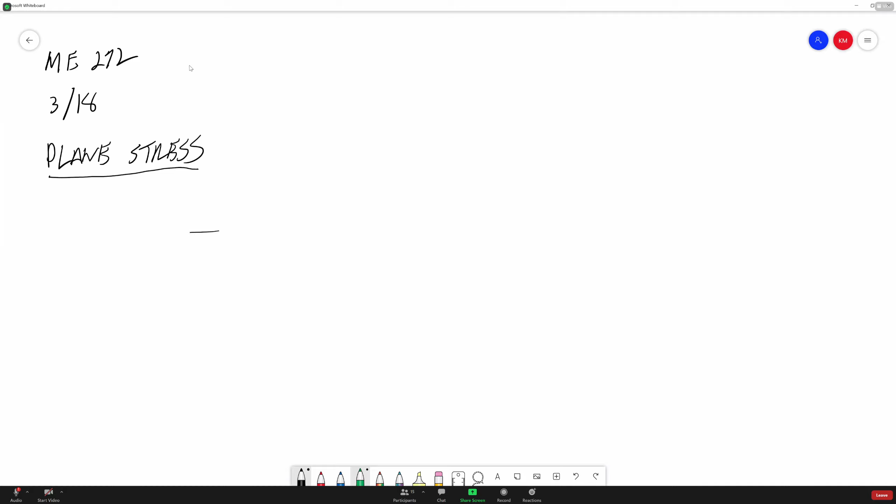So plane stress is a condition that you assume when you have thin plates, very, very thin plates. I guess we need a coordinate system here. We'll just do X, Z, and Y. And we have a condition where we can have sigma XY, opposite sigma XY. Actually, we could write this like this. Hold on.

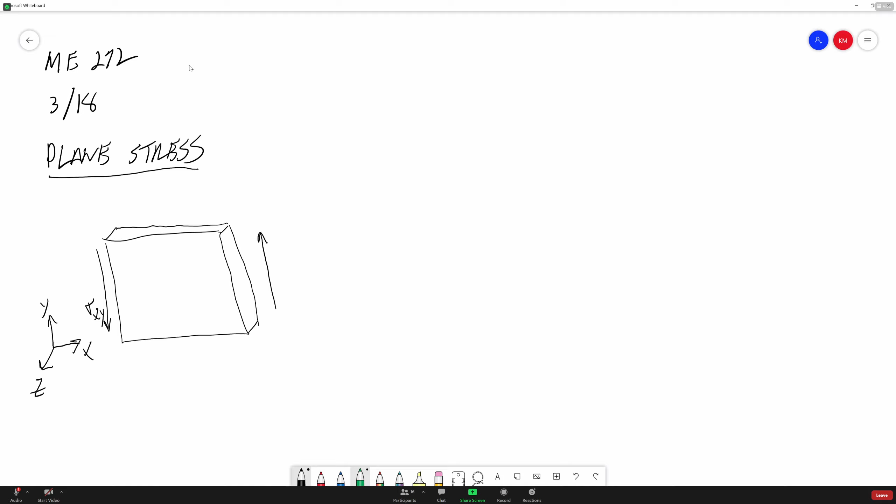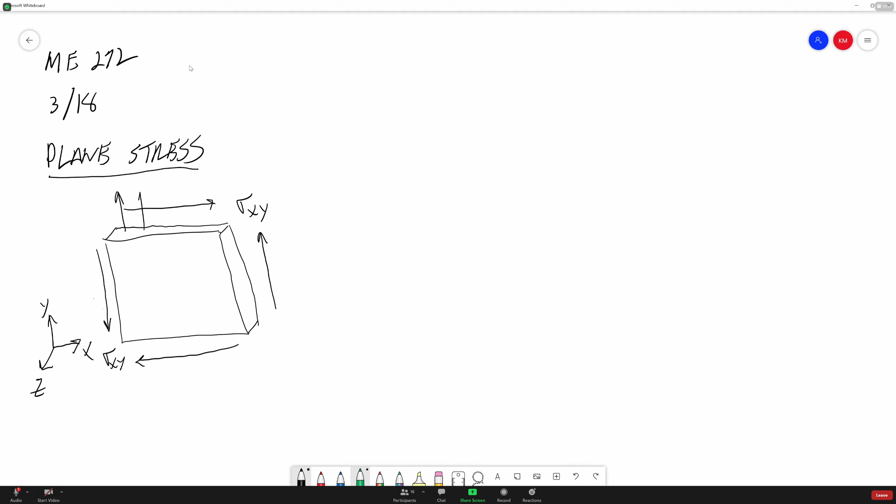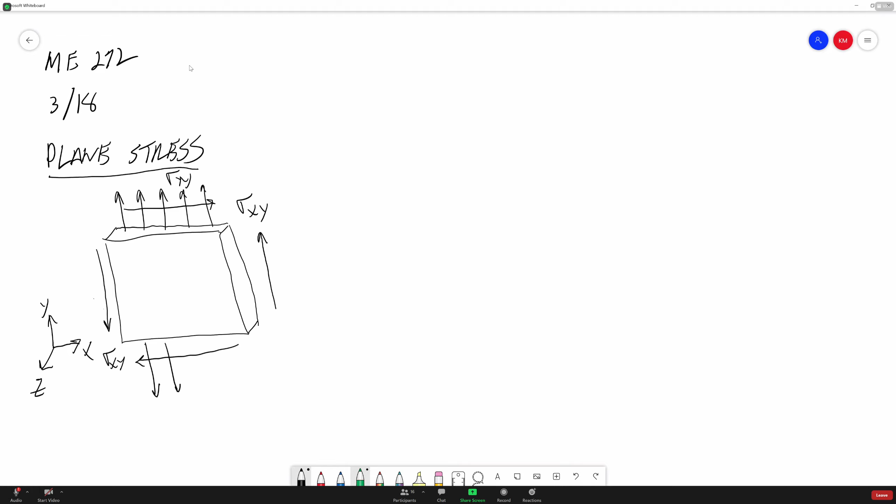So it corresponds to both. And then out of the edges, we have sigma YY, sigma YY, sigma XX. So some of the bullet points: plane stress corresponds to a condition where all three out of plane components of stress are identically zero throughout the region.

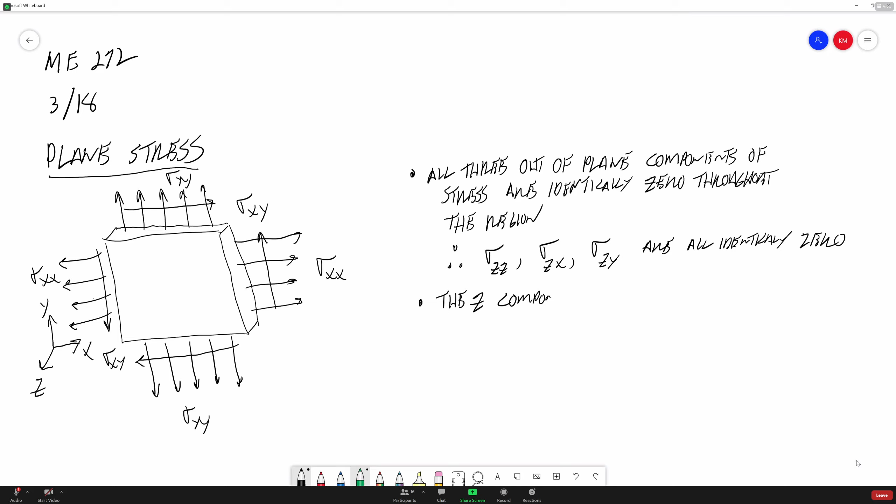So that means sigma ZZ, sigma ZX, and sigma ZY are all identically zero. So we have no stress through the cross section of the material. It's super thin, and I always think of this as almost like a plane, an infinitely thin sheet. But the big but is the Z component strains are not necessarily zero.

For plane stress in the XY plane, the magnitude of these Z component strains depend on the constitutive equation.

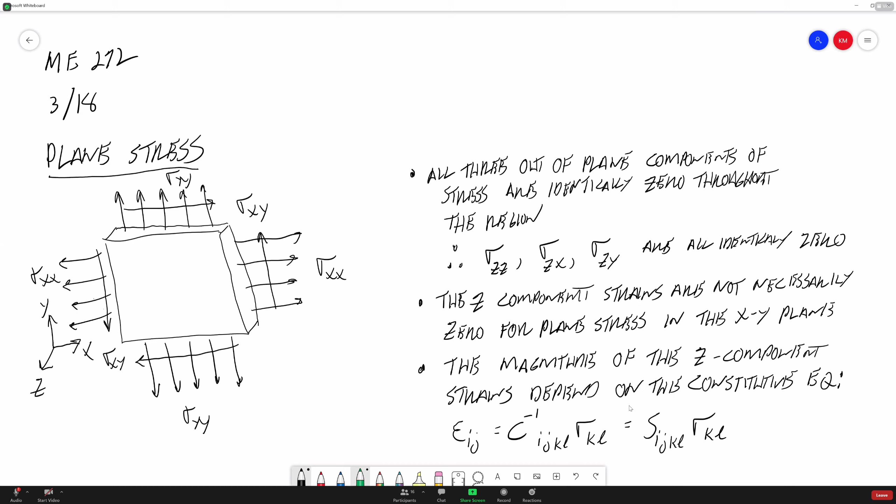epsilon_IJ is equal to C inverse_IJKL sigma_KL, which is also equal to compliance S_IJKL sigma_KL. So the magnitude of our Z component depends on that constitutive equation.

The out of plane normal strain ZZ is non-zero for materials having a non-zero Poisson's ratio.

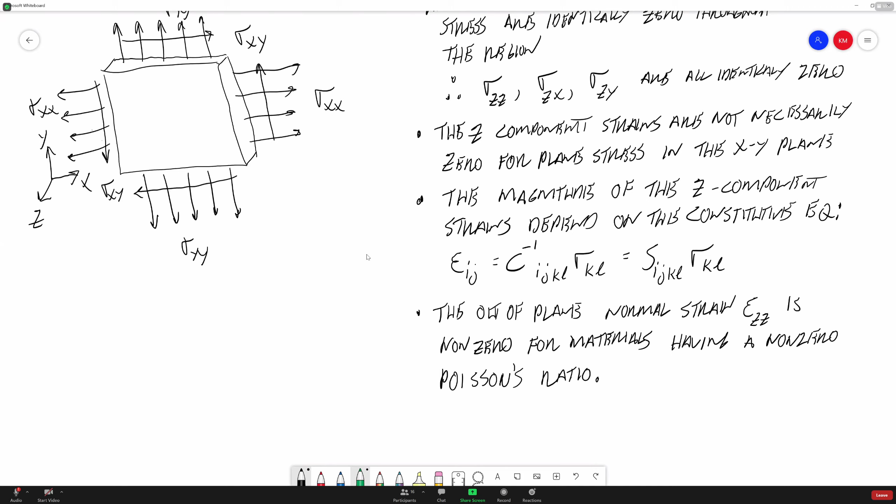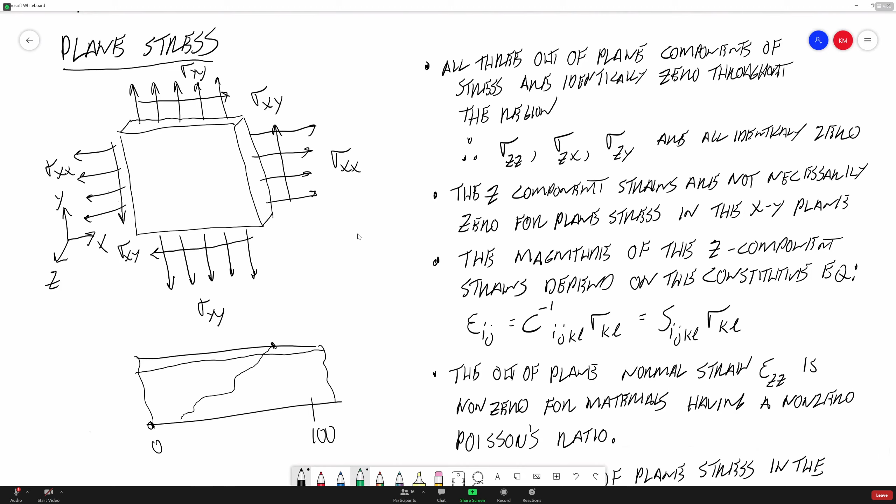And then the opposite of this is plane strain, right? That's where you have a nice big cuboid. So plane strain. This is a very good picture. Maybe we just write out the bullets first. Let's do the bullets. Well, the photo I have here is kind of just a, yeah, I don't like that. Exaggerate it.

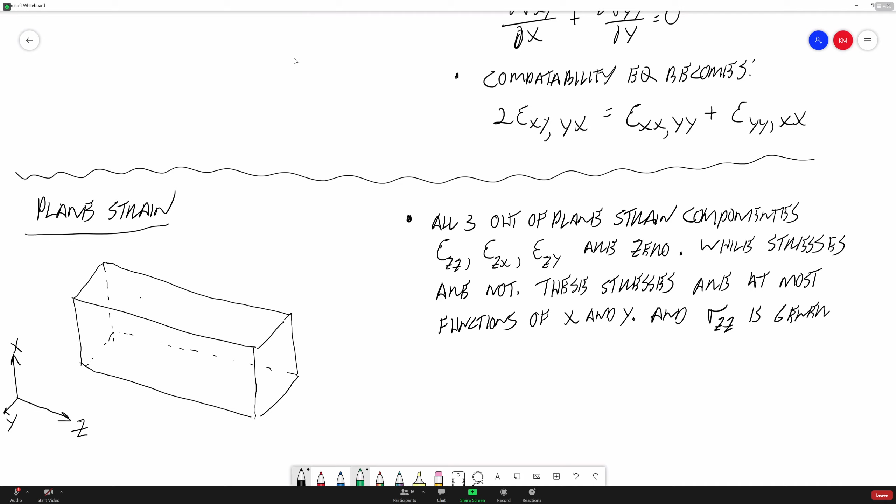Something to note is these stresses are at most functions of X and Y. And sigma zz is generally non-zero.

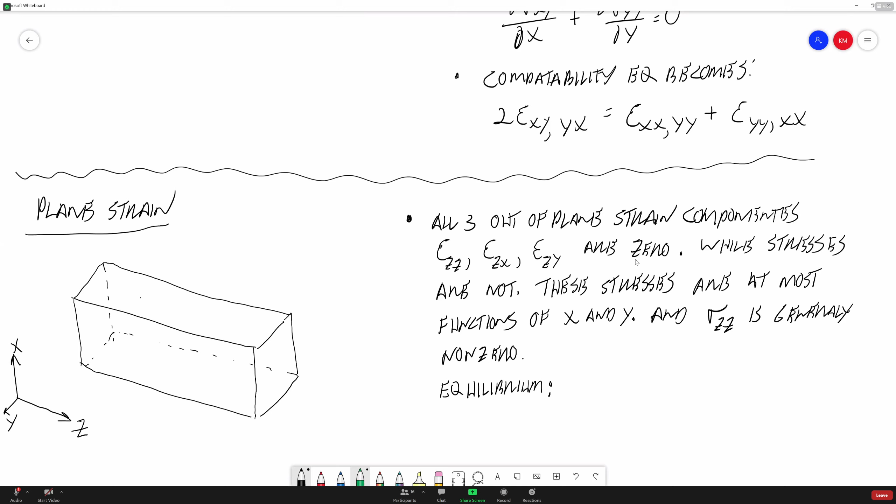So equilibrium looks like partial sigma xx with regards to x plus partial sigma xy with regards to y equals 0. Partial sigma xy with regards to x plus partial sigma yy with regards to y equals 0. Where sigma zz is equal to a function of x and y.

Stresses are considered independent of z. So compatibility looks like this, and it's the same.

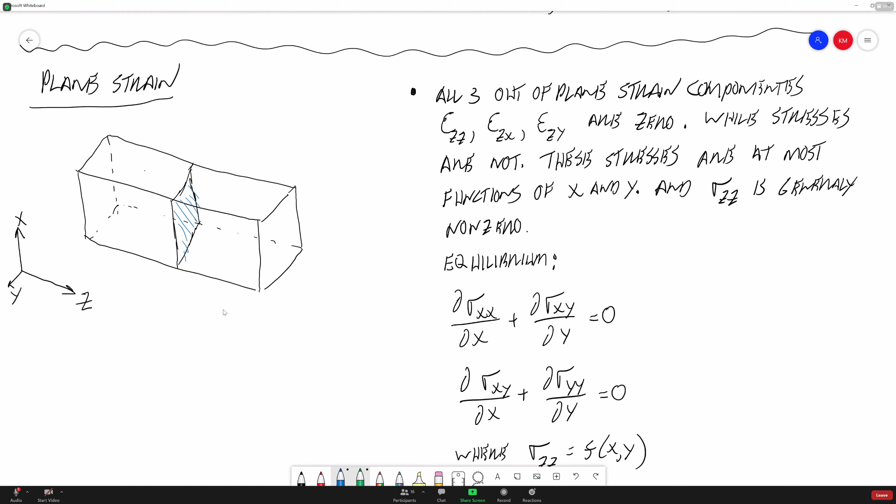So once again, it's kind of up to the user to say, oh, I have a really thick, long component. I'm looking at this cross section in here, and my Z is really long relative to my X and Y. So I'm gonna assume that my strain out of plane in these are 0. You can calculate it, but it's going to be kind of in the noise. So when it comes to finite element methods, it doesn't come into play at all.

You just calculate displacements regardless of this, and then you use your constitutive equation to find your stress. So finite element method won't take that into account. It's up to the user to say, oh, this is a thin plate, therefore I'm not gonna pay attention to the stresses going through the cross section, or oh, this is really thick here, I'm not gonna pay attention to the strains going through this. I'm only gonna focus on stresses, or vice versa.

Right. Yeah, if you were using shells or surfaces, you're kind of assuming there's no... It's plane, yeah, plane stress. Yep. So you're not worried about the thickness, the stress through the thickness. Mm-hmm. That's right. Okay. So that's a little bit on plane strain, plane stress.

There is one other topic it would have been cool to really get into, but we need like the whole rest of the class to do that. There's some stuff that has to do with bending and what really goes on in a simply supported beam. In general, it's kind of an interesting topic, and I'm just going to talk to you about it very conceptually, so you know that there's something going on there.

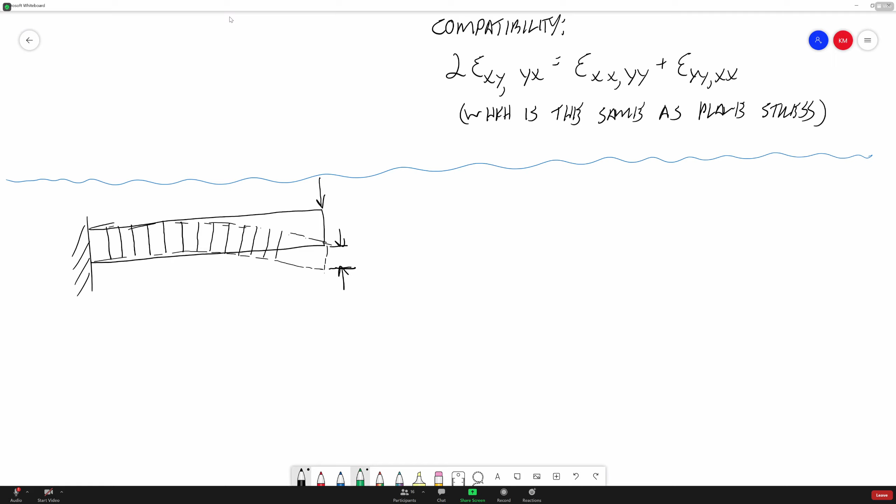One of the big assumptions is we assumed that when this beam deforms, it's basically deforming in very uniform planar sections, right? This beam is made up of a whole series of these, think of it like a loaf of bread, planes that stay rigid, if you will, and they're just allowing this thing to stretch. So if you were to look at a small section right here, maybe this side stays here, but this one kind of goes like that. So you get stretch here and compression here. So this guy gets longer.

This guy gets shorter. And we had this thing that we called the neutral axis, right? Where this was kind of nominal. Does that kind of sound familiar? That we made that very generalized assumption, and depending on who you took, they might have pointed that out to you, but it was like, yeah, whatever, right? Tell me what I need to do to find the displacement at the end of this.

But this is a very interesting point. Have any of you ever done a simple problem like this, where you calculated this by hand and then you did it by FEA and see if you get the same displacement? A long, long time ago. You get a different number. Does anyone know why? These planes in reality do not stay planes.

They're not. So what happens when you do that bending, you end up getting this. I'm going to butcher this, try and draw this three-dimensional, but let's try this. Potato chip cross section. Yes. You get potato chips. And in the beam theory that you learned in undergrad, that's not taken into account.

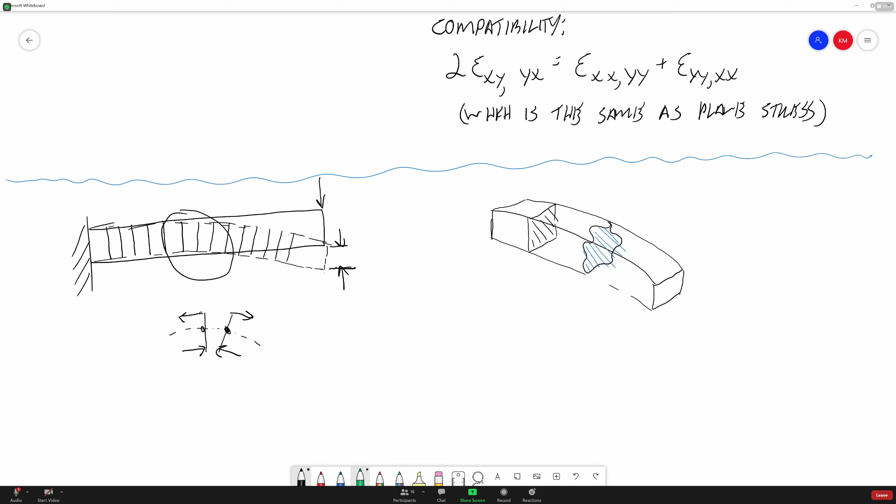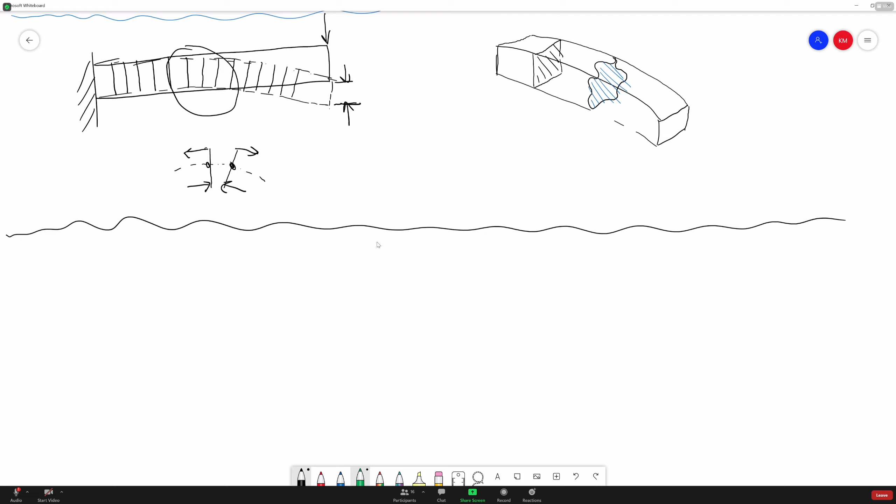So what I wanted to go over today is, I start off the finite element section showing different ways that you can solve problems. And this one that I'm going to show you right now is very, very conceptual because it's from a dynamics perspective. It's called the Lagrangian. Well, a Lagrangian applied to a finite element string problem.

In finite element, a lot of folks, especially mechanicals, when you hear that, you immediately think of this potato sliced up into a mesh, and you have this contour of stresses and strains and things like that. That's not what finite element is. Finite element is really just, we have a problem and we're going to break it up into discrete known areas or sections, and we want to find the displacement field of it. And it can be for a range of things.

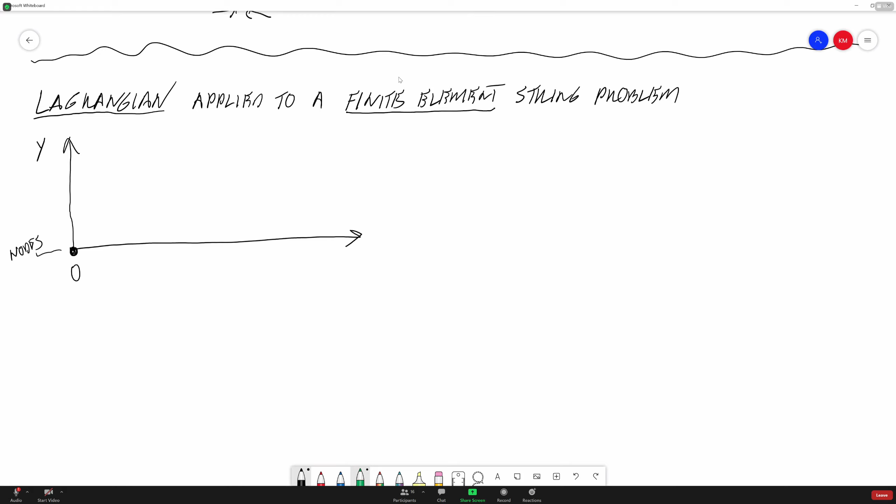So this particular problem is for a simple string. And let's call this little thing down here at the bottom 0, and we're going to say this represents nodes. Our vertical is our y-axis, and our horizontal is our x. And let's say that I have this, I'm just making something up here, it's a string. And the length of it is just x equals L.

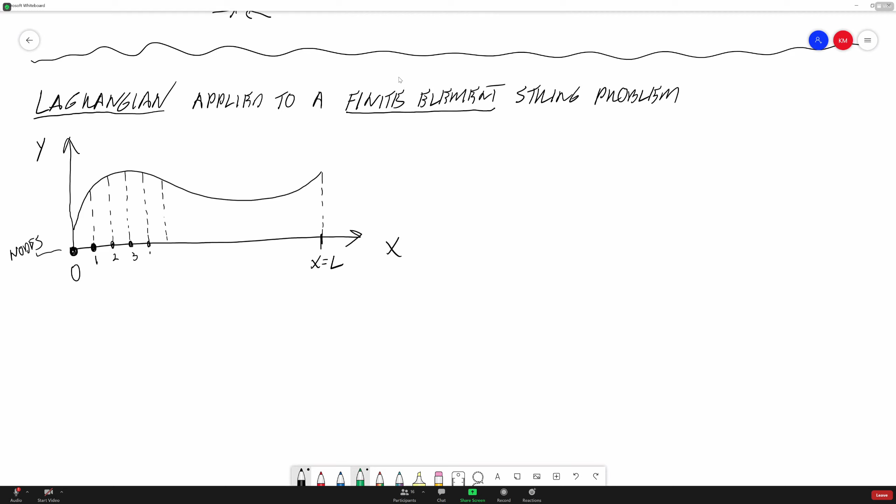And I'm going to break this thing up. I'm going to discretize it into evenly spaced known intervals. And I'm going to say that each one of these points here represents a node. So this is 1, 2, 3, 4, so on. And I'm going to say that this height right here is simply y of x, t.

So that's the displacement. So y of x, t is equal to the displacement of our string. And let's say I have these little sections in between the numbers, n, n, n, we're going to call those elements. So n is equal to my elements. And I have n plus 1 nodes.

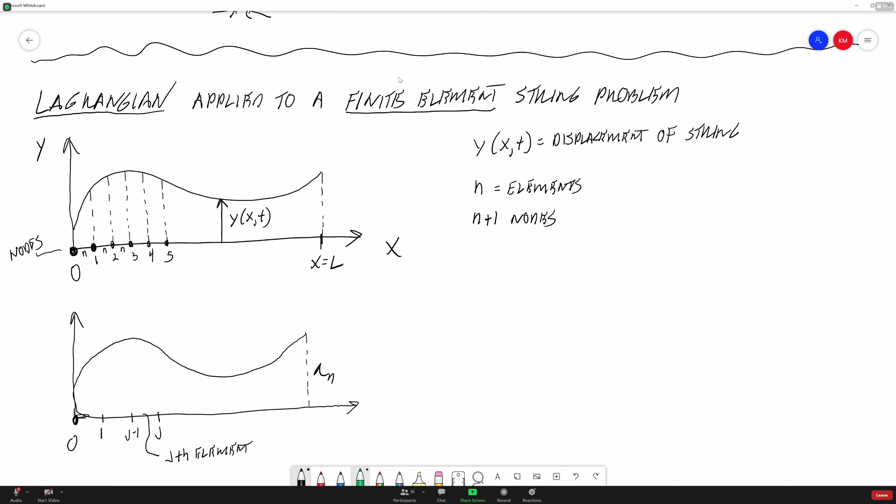Let's see here. So a_n here is the height. So the height of this guy here is a1. This one here is, actually, sorry, that's not a 1. It's a_i. This one is a_(j-1). And this one is a_j.

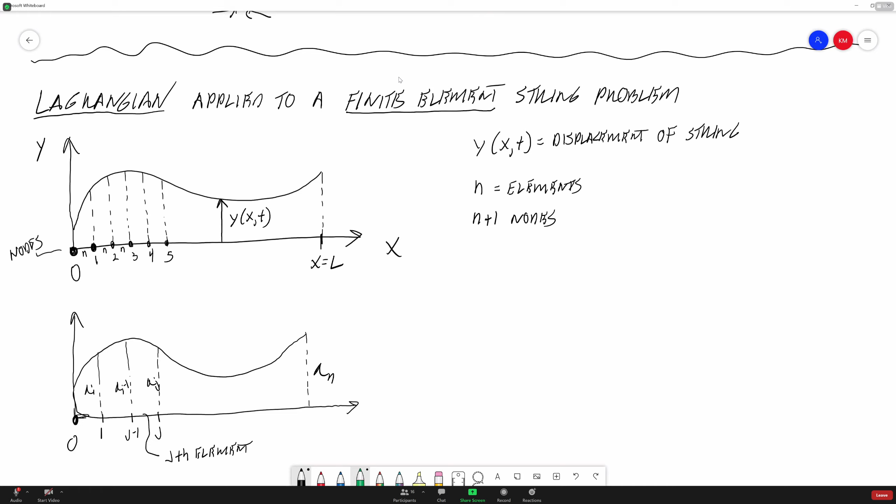And this doesn't have to mean too much at this point, but essentially what we're doing is we're creating this pseudo mapping. So we're going from this XY domain, breaking it up into elements, and we're going to go to this xi domain.

Is that how you pronounce it? Yeah. How do you, what's the right way to pronounce that? Xi, the Greek letter? C? That's how I've always heard it. I've heard Z and Xi. I'm not sure. Xi? Yeah, okay, Xi. Yeah, I think that makes more sense.

But so ultimately what we're gonna get to is, I'm gonna kind of come down a little bit, wrong mouse. And I'm gonna blow this up to look at just a couple of elements. I'm gonna simplify this a lot. Okay. So what I need to do is I need to discretize this so things are a little bit simpler. So we have to map from our XY coordinate system to this other domain.

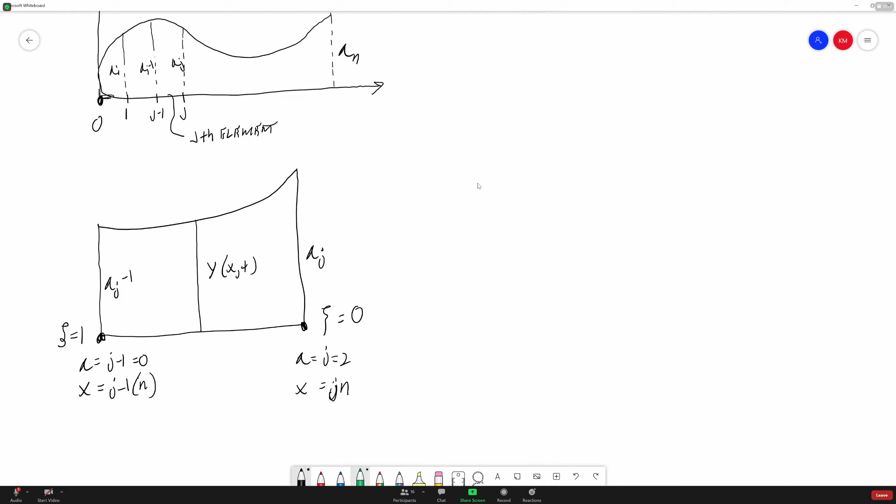And down here, to try to represent this, I have my, yeah, this is kind of my connection. A is equal to j minus 1 is equal to 0. And this is x equals (j minus 1)n. And this guy over here is A is equal to j equals 2. We have to create this different space. And this problem's a little confusing for it, but it'll make more sense, I think, when we do the other finite elements.

But essentially, I have this equation, which is y(x, t) is equal to a_(j-1)(t), and I need to introduce these variables, if you will, so theta 1 of x, plus a_j(t) theta 2 of x, where (j minus 1)n is less than or equal to x, which is less than jn.

And theta j minus 1 of x and theta j of x are called interpolation functions. They're not going to mean much because we're not going to get into talking about them right now, but just go with it for now.

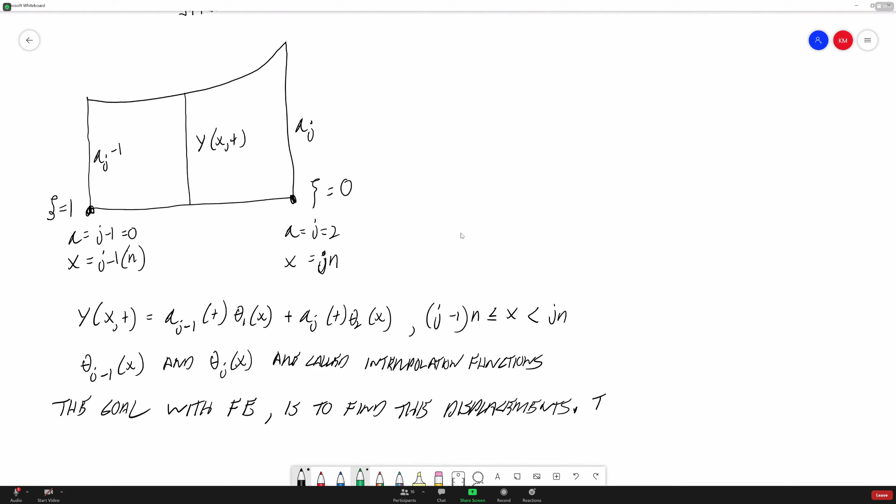So the goal with FE, finite element, is to find the displacements. And to find the displacements of the string is to find the displacements of the nodes. So if you find how much the nodes move, you know the displacements. And once you know the displacements, stress and strain are easy.

So finding y(x, t) for the jth element is simply reduced to finding the nodal displacements.

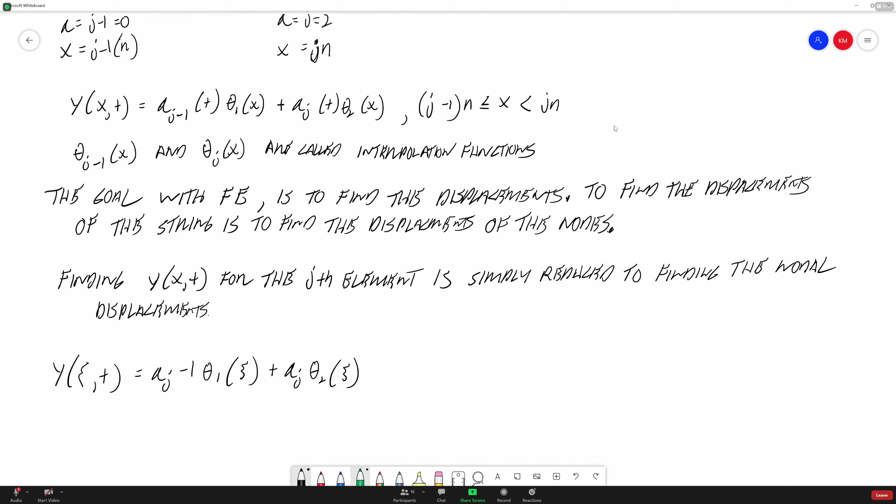So we're going to use these interpolation functions. So we're going to switch this y x of t to a y xi of t. We're going to say that is equal to a j minus 1 theta 1 xi plus a j theta 2 xi, where theta 1 xi is equal to xi, and theta 2 xi is equal to 1 minus xi.

y xi of t is equal to a j minus 1 xi plus a j 1 minus xi. And dy dxi is equal to a j minus 1 minus a j. So that's the change in y relative to xi. So at xi equals 0, y 0 of t is equal to a j. At xi equals 1, y 1 comma t is equal to a j minus 1.

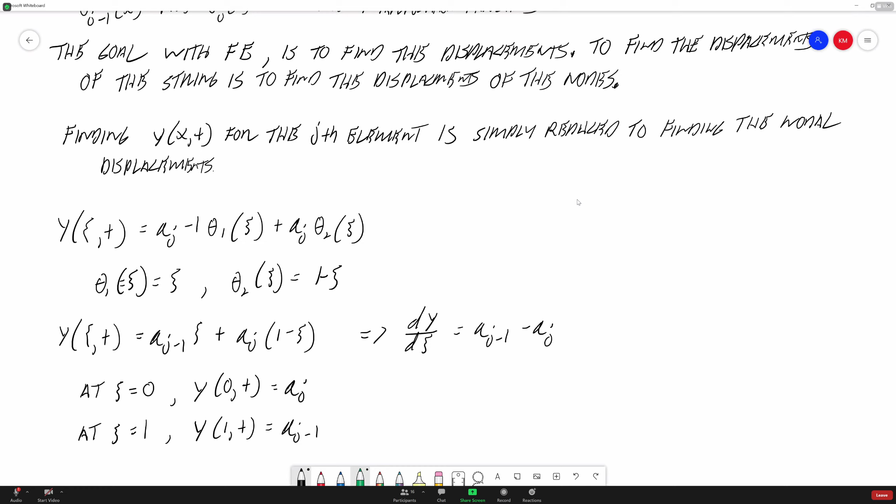Okay. And then this is where the dynamic stuff kind of comes in. We're going to find the kinetic energy of the string. We're going to say T is equal to 1/2 the integral of 0 to L, rho x, y dot squared x comma t dx.

We don't have a lot of time, so I'm gonna skip to the, it's kind of worked out. It ends up being 1/2 the sum of j is equal to 1 to n, integral of 0 to 1, rho xi, a j minus 1 derivative of that, plus 1 minus xi a j. Okay.

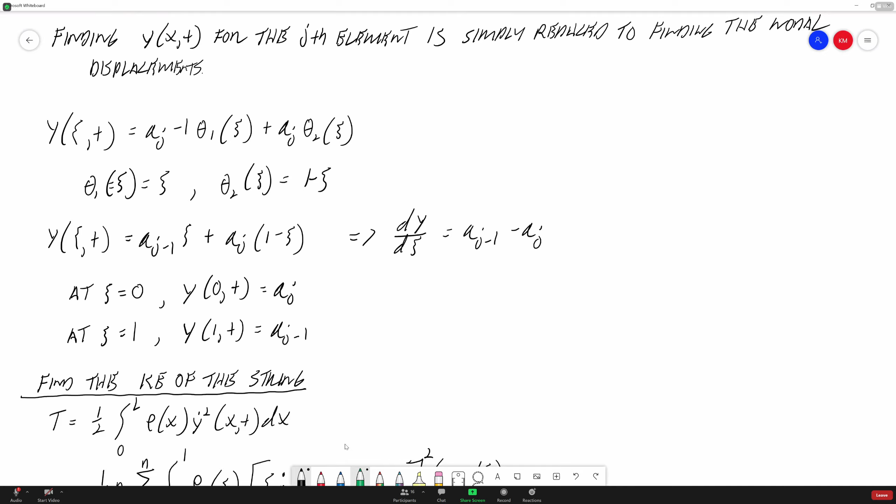Okay, I kind of skipped ahead with the kinetic energy. So let's come over here to the side. So I should have, after giving you a little bit more information, the relation

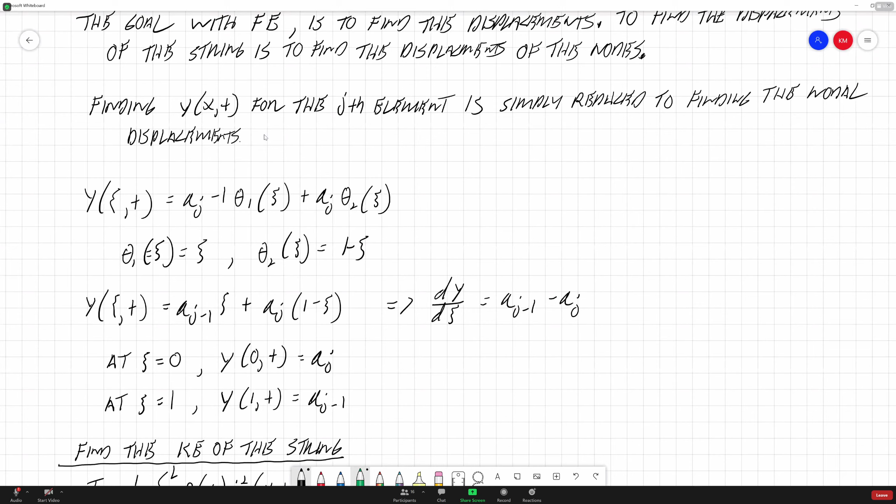Professor, I was just saying on the previous one where it says finding y of x of t, that shouldn't be finding xi of t, should it? Where? Just before find the kinetic energy of the string, it was finding y x of t for the jth element. No, that we just were. Yeah. So ultimately, that's what we're trying to find, but we're converting it to xi. Okay, got it. Thank you.

So some relations that would have been helpful before I got into the energy. So this whole section should have been plugged in before kinetic energy. So x is equal to j minus xi n, or xi equals j minus x over n. For the first element, x equals 1 minus xi n, and dx is equal to minus n d xi. So xi is equal to 0 at x equals n, and xi is equal to 1 at x equals 0.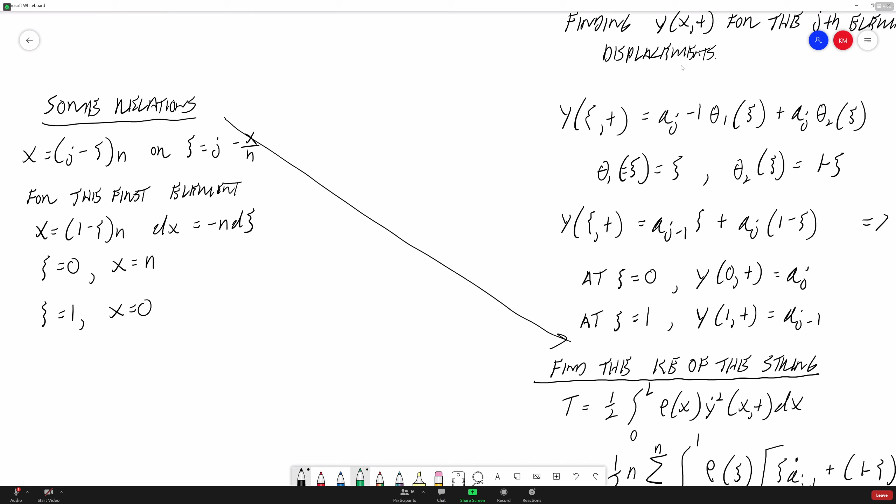For the second element, so that is j equals 2, we have x equals 2 minus xi n. c is equal to 0 at x equals 2n, and c equals 1 at x equals n. So what this is saying is we're going from node 0 to 1, and we're saying that is c 0 to 1. And that's element 1. When we go to j equals 2, now our node 1, we're calling c0, and c1.

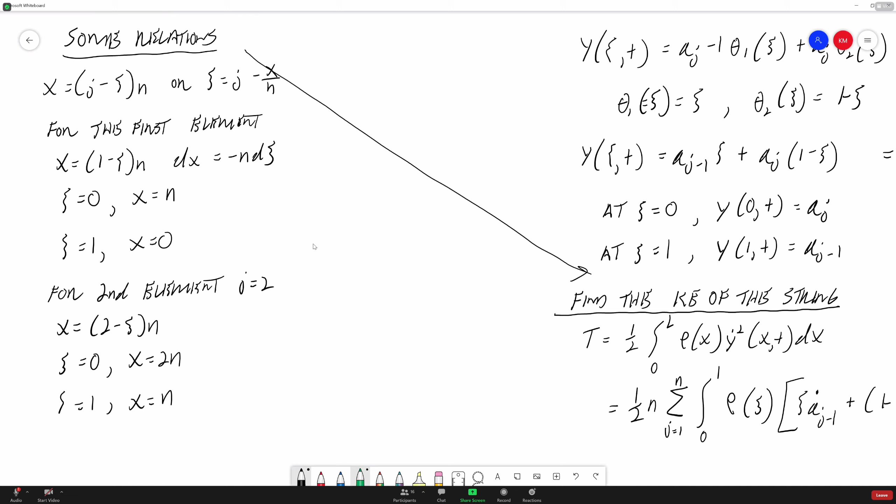And we're going to go to the next one and the next one. And each one of those finite spaces, instead of trying to keep track of our node numbers, going from node 0 to 1, then node 1 to 2, node 2 to 3, node 3 to 4, it's always c 0 to 1, 0 to 1, but the element increments. It's a way of mapping, and it's part of the finite element method that we'll be using later on. It does the same mapping.

So for energies, we have some relations. dy dx is equal to dy dc dc dx, is equal to minus 1 over n dy dc, and dy dt is equal to the first derivative of a j minus 1 c plus the derivative of a j 1 minus c. Okay, so that all was just a little relations that should have went before we did kinetic energy.

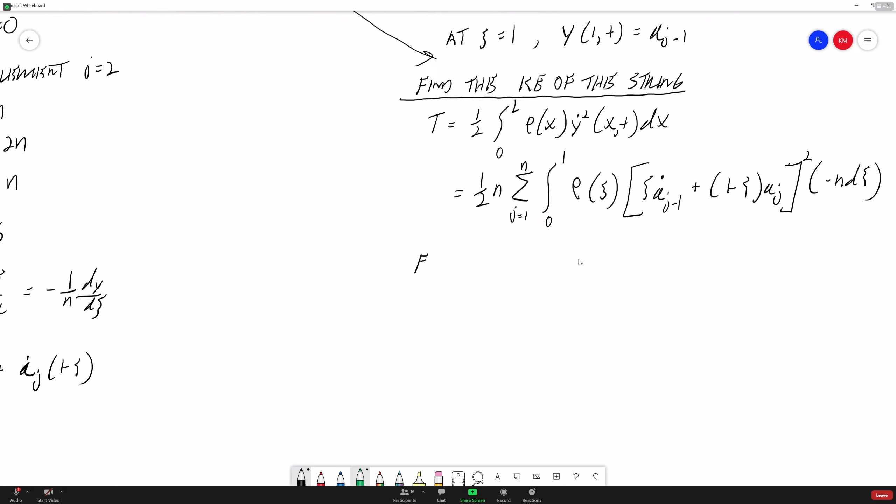And then, just scroll back to that just a moment. Thank you. Okay. And then I'm overly going to simplify this. Then we find the potential energy, and I'm just going to go right to it. So potential energy V is equal to 1/2 1 over n, sum of j is equal to 1 to n, integral of 0 to 1.

T, big capital T, which is tension in the string, Tx times the partial of y with respect to x. Oh, well, I mixed that, sorry. I'm gonna delete that part. Started mixing equations. T, C, aj minus 1 minus aj squared d xi plus 1/2 K a n squared, where we assume a spring down here at the bottom, and this spring is K.

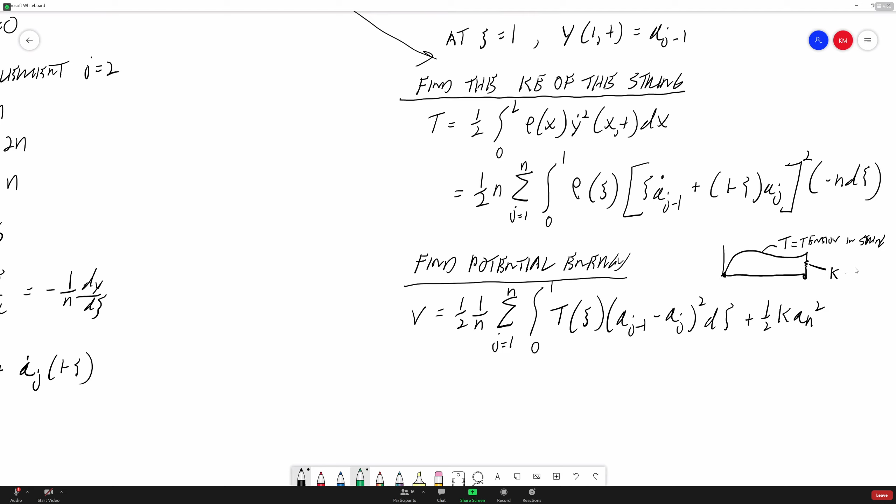We simplify our energies as such. So potential becomes V is equal to 1/2 A transpose KA, where A is equal to a column vector of A1, A2 to AN. And K is a stiffness matrix. We could have very easily called this C, right?

Stiffness matrix, where K is equal to the second partial of V with respect to AI, AJ, where I and J are equal to 1, 2, to N.

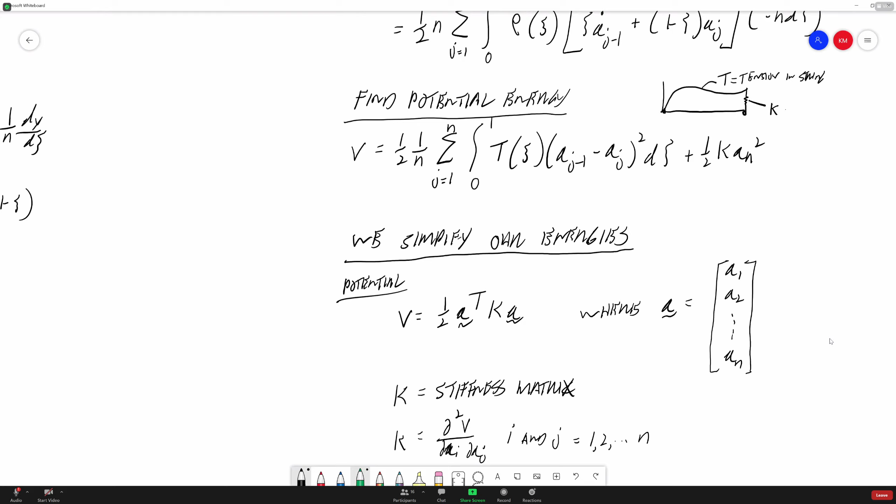Kinetic becomes T is equal to 1/2 first derivative of A transpose M A derivative, where derivative of A is equal to exactly what you would think. And M equals mass matrix.

So, we're not going to finish this. Maybe we can. I'll simplify it. So the Lagrangian, does anybody know what the Lagrangian is? The Lagrangian L is equal to kinetic minus potential. And ultimately what you do when you do this finite element method using the Lagrangian is we find this QJ, and this is the J generalized force.

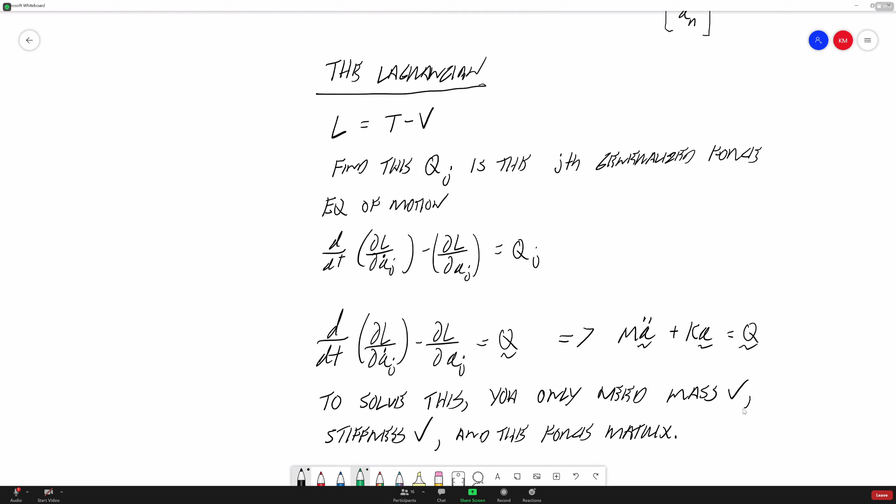But we take these partial derivatives, and that gives us this form of mass times acceleration plus the stiffness times displacement is equal to Q. And this definition I haven't given you yet. The QJ is actually equal to the partial of the virtual work, which we're not going to get into, with regards to displacement. And this guy right here is the finite element solution for the jth element.

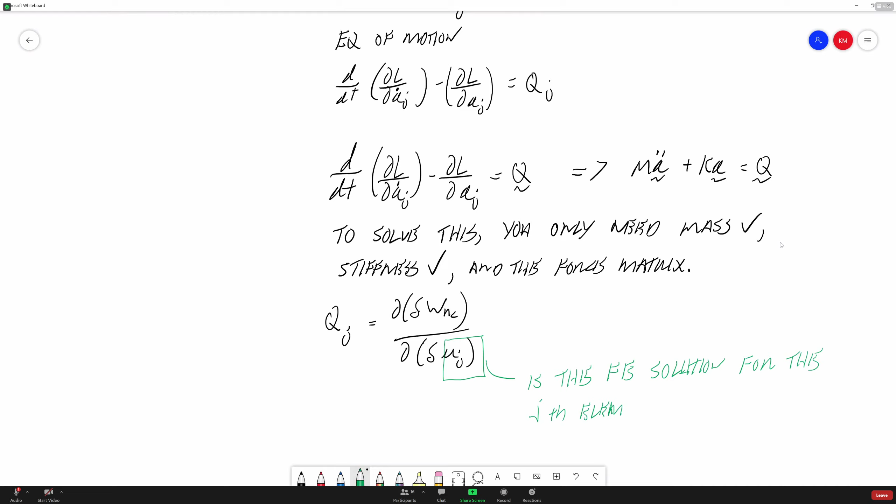So in this particular case, it's kind of a long way of going about it, but you go from this XY coordinate system, you discretize it, you say each one of those elements is this xi 0 to 1 space, and you come up with this notation of AJ minus 1 to AJ. This perspective of breaking it up looks at energy levels, and then you find the force, and from the force you can back out what the displacement is, assuming that you know the mass and you know the stiffness,

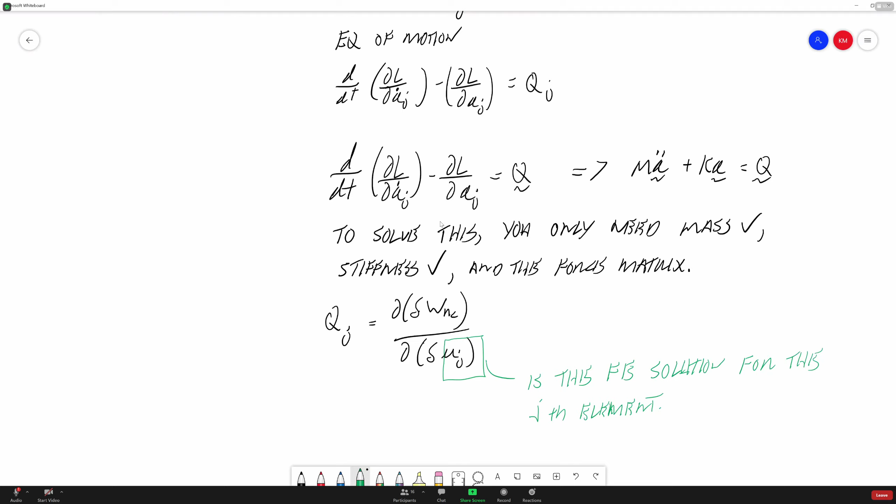which could vary as a function of that displacement if you wanted it to, but it doesn't have to. So this is just one application of finite element method, doing it from a dynamics perspective of the Lagrangian. It has some similarities to the stuff that we'll be doing, mainly where you have to map from one coordinate system to another. We won't have to do energies, and we'll find the displacement fields directly rather than trying to find forces. But anyhow, long convoluted problem. Sorry, I thought I remembered it being shorter than this.